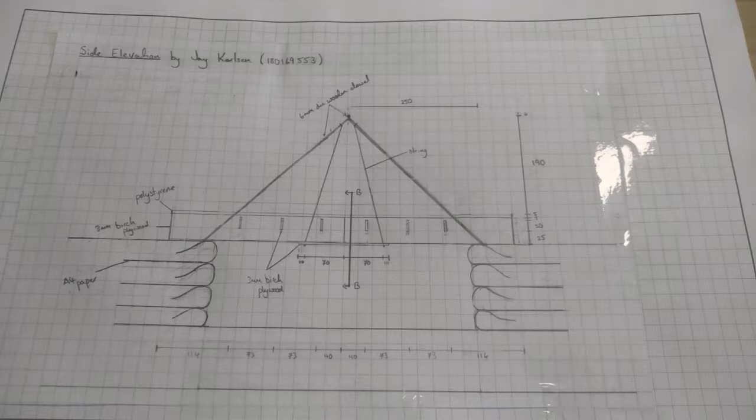Of our design was dependent on requirements and materials. We also searched some documents and decided our initial design. First of all, we can see the side elevation.

One area that deserves attention is our base, where we chose to use A4 paper and sand. We put paper first and then we added sand on the paper, pressed it down so that the high-density sand becomes a solid base. Also, it not only reduced the material usage but also the cost.

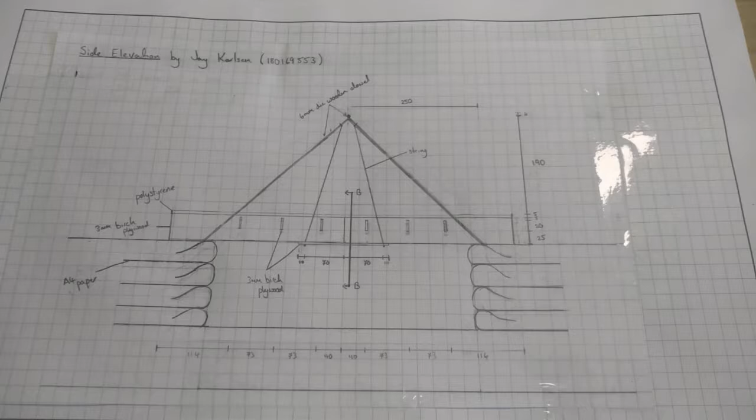Next, we noticed that the distance between the two bases was 450 millimeters, but according to the given size of the plank, we need to divide the bridge into two parts for a joint, which means that the middle part of our bridge needs to be glued together. Therefore, in order to increase the strength of the bridge, we add some sidebars inside the bridge and connect the piece of wood plank with string below the joint.

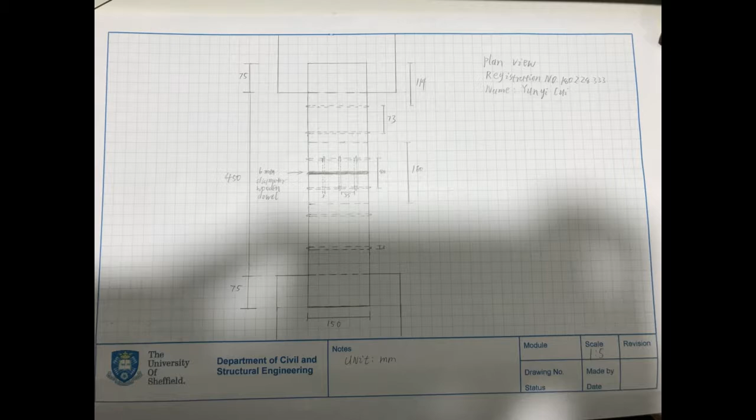As you can see from section A to A, we even added some sidebars parallel to the bridge to make the joint strong. From the top view, a 6mm wooden dowel was necessary because it allowed the bridge to undergo a small shear force, which can make sure the bridge was safe. In a word, all of our designs were aimed to make our bridge safer.

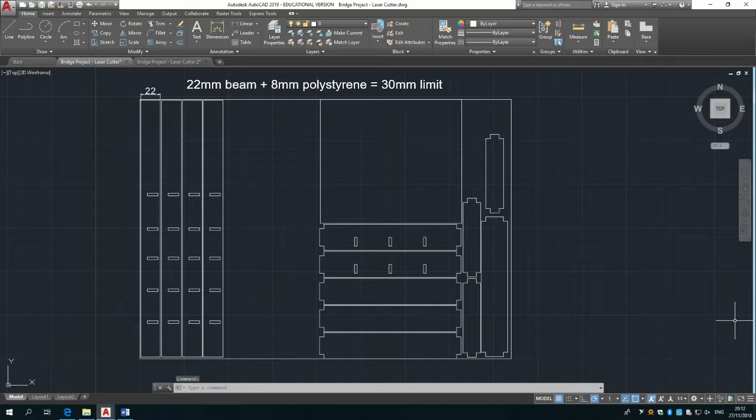We had to make fundamental changes to our design after receiving feedback during the build session. Our original model had a deck thickness of 55mm when the maximum allowed by the brief was 30. I amended my original laser cutter model by reducing the beams to a thickness of 22mm. This was as large as was allowable, as the polystyrene had been hand cut to a depth of 8mm.

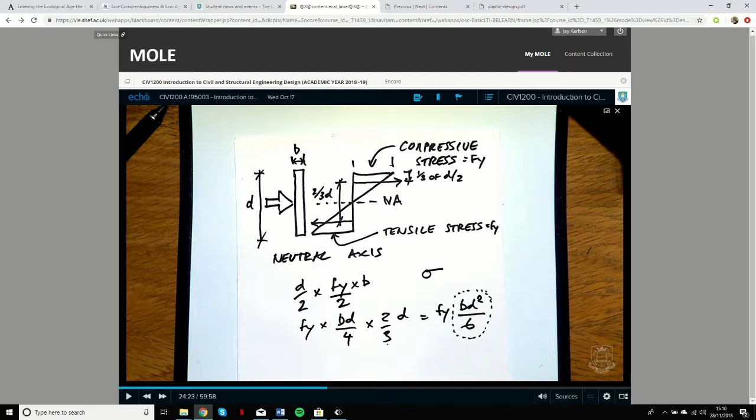Unfortunately, our design revolved around maximising the deck thickness after learning about its effect on stress and moment in CIV1200. This meant our revised design was far weaker than the original proposal. Thankfully, after reducing the width of the beams, plenty of plywood was freed up, allowing me to add more crossbeams to the design, taking us from 6 to 10.

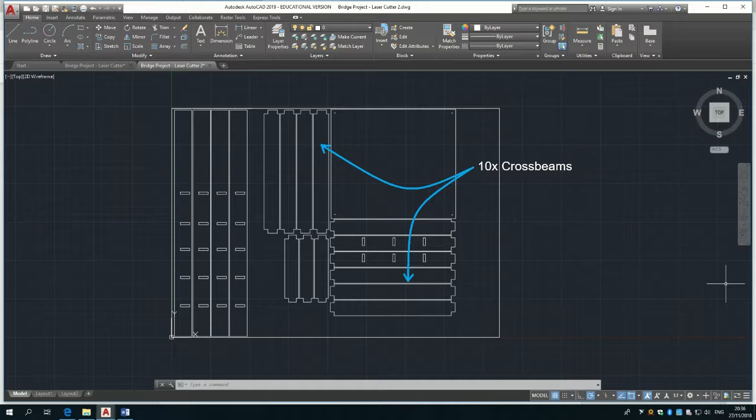I did this in the hope of more evenly distributing the load and reducing the stress on our now weaker frame. While I don't believe it took us back to the strength of the initial design, I think it allowed us to compensate somewhat and was the best I could do without altering our whole design.

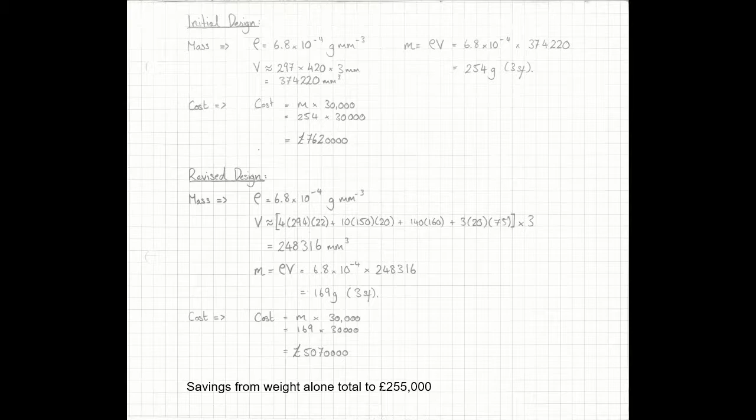Additionally, as our final design used less material, our final mass was lower, allowing us to reduce the overall project cost. On top of changes to the frame, we decided to attach the superstructure to the bridge deck using sellotape. This prevented the dowels from splaying outwards under load and causing collapse by providing resistive tensile forces.

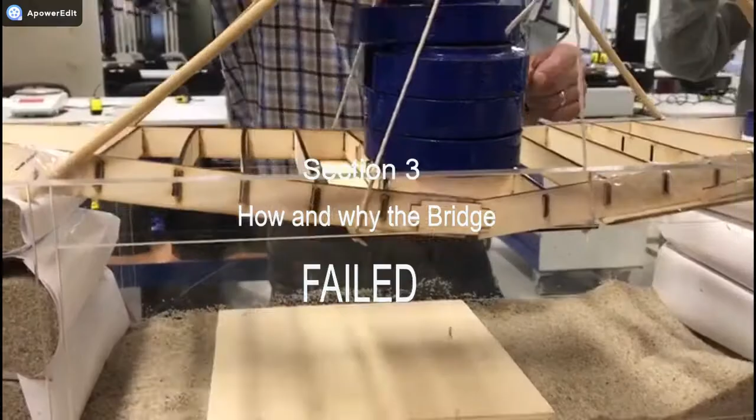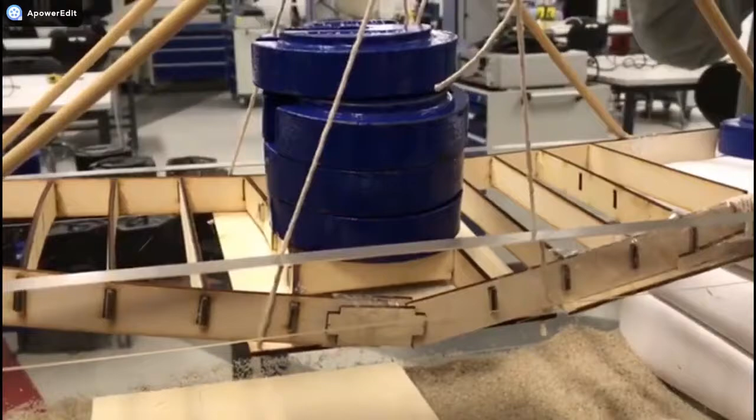Let's go to section 3, see how and why our bridge failed. When we put 4 kg mass on the bridge, the joint started out of position, and the bottom board didn't share much pressure. But the other side is working well. This shows that the bearing of the bridge is not uniform, and the tape we wrapped on the front side is not very strong, and that makes the structure change.

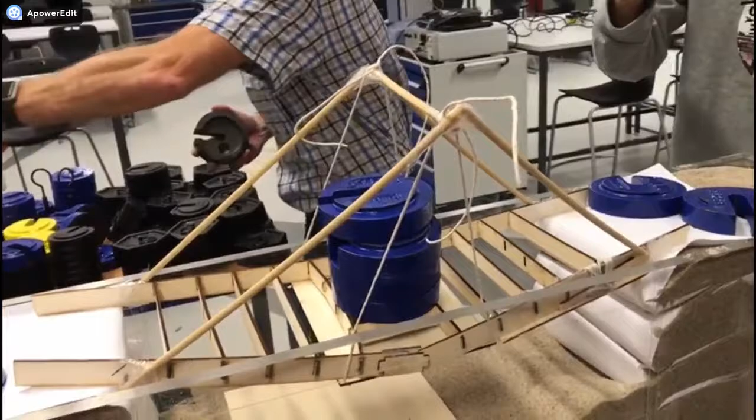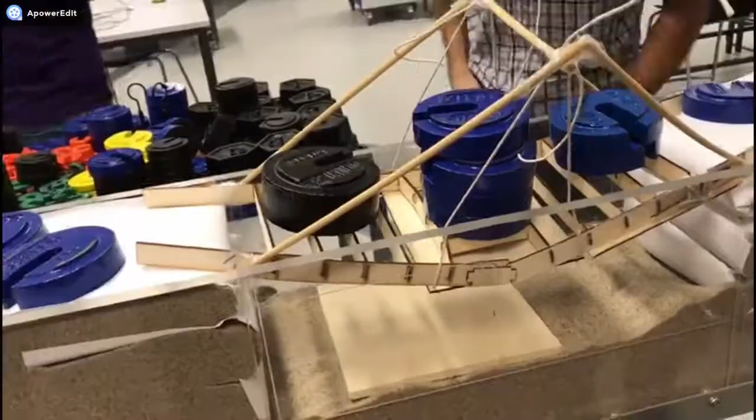When we start to add weight to the bridge, the deck began to tilt. Everyone's running off the bridge. Yeah, this wasn't here. And we can see from here the joint is out of position more and more. It's just that thing's getting...

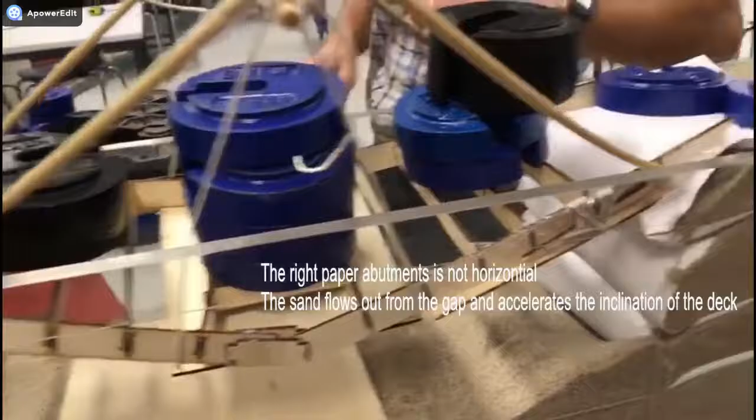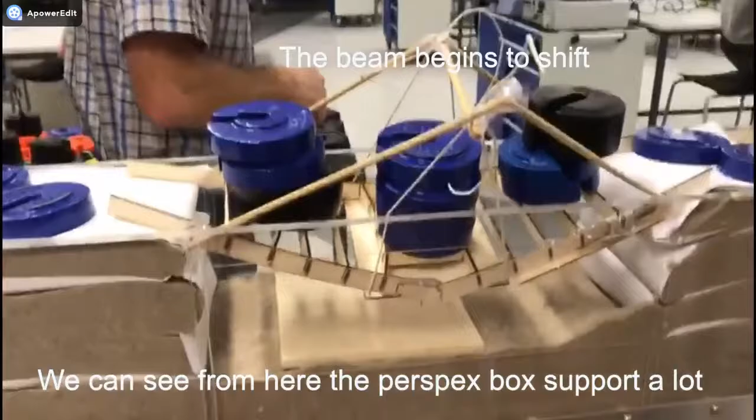The right side of the paper abutment is not horizontal. The sand flows out from the gap and accelerates the inclination of the deck. And the beams begin to shift. We can see from here the perspex box supports a lot of mass. And what happened next? Do we feel this is now? Yeah, it's failed.

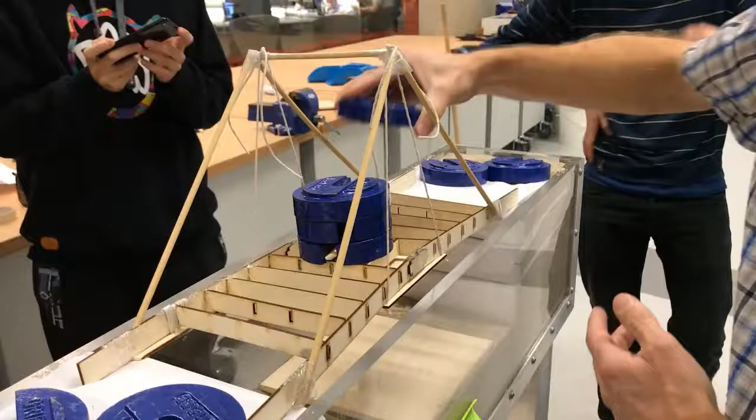If we were to do this again, there are improvements that we would make to build a better bridge. The middle of the bridge deck failed first, therefore the joint in the middle will need to be improved. For our bridge, the joint in the middle between the two pieces of plywood at the sides were connected together by sellotape, and the connection became loose when the load is applied because of the lack of support and the properties of the tape.

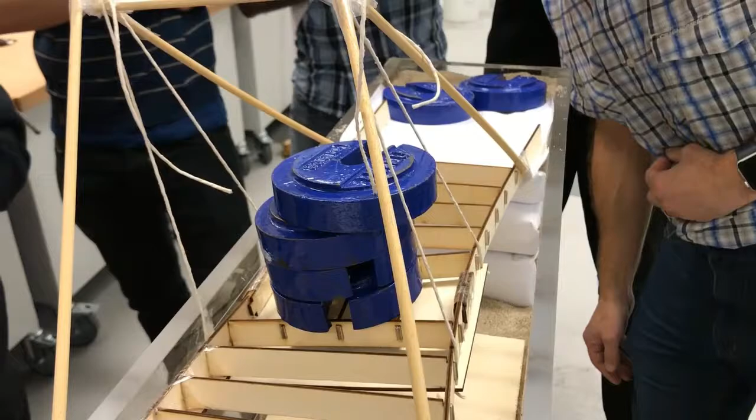The plywood underneath the superstructure will need to be redesigned to support the plywood beams at the sides properly to avoid it from bending with only a small amount of load. In the test, one side of the beams was properly supported and remained intact even after the test. Therefore, if we make the plywood underneath wider or fix it in place with some tape, we can significantly reduce the deflection in the load test, especially during the early stage.

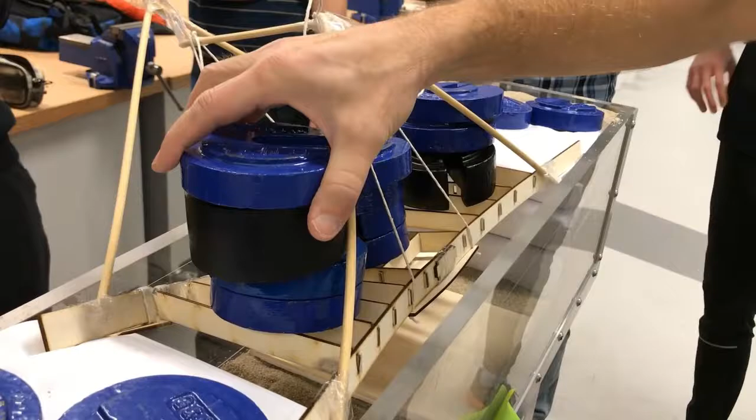Filing the end of the dowels to the right angle will help to produce a more rigid connection between them to allow more load on the bridge before it ultimately fails.